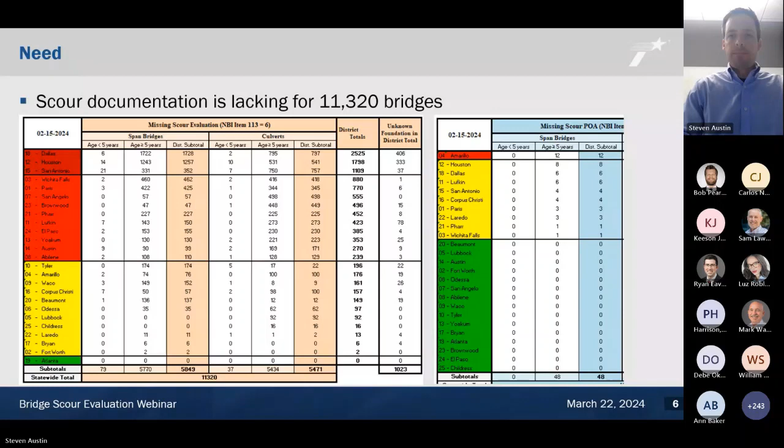Local governments don't always provide complete information to properly inventory bridges. So the outreach to ask to send this out to local governments was to help spread that awareness and increase awareness of the need to have complete information.

Some scour evaluations performed in-house and by consultants are sometimes incomplete or overly conservative. So this webinar will touch on that and make sure that we're consistent across scour evaluations. And finally, TxDOT staff aren't always clear on expectations for reviews.

Our presenters today are Ryan Eaves, our state geotechnical branch manager out of Bridge Division. Chunh Lee, our scour engineer, is really our lead technical resource with anything related to scour. He's a primary author for our scour evaluation guide and really takes the lead on updating our forms and making those changes. Yusuf Yurattas recently joined Bridge Division as a scour engineer, and he's working with Chunh on our documentation, our policy, and quality controls. Mark Wallace is our bridge inspection program manager and bridge inspection branch manager, and he'll be talking about the bridge inspection side of things. And Bob Pearson, who is a bridge inspection quality assurance engineer, working under Mark Wallace. So with that, I'll pass it over to Ryan to start talking about TxDOT scour evaluation and scour coding.

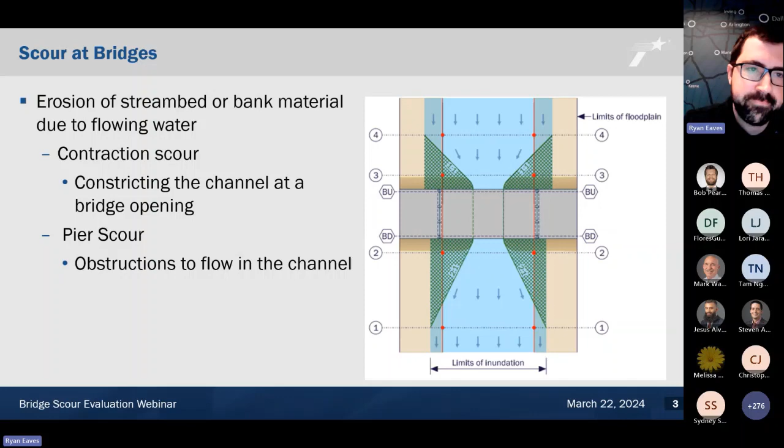One of the big concerns with scour at bridges is foundation exposure, or loss of axial and lateral capacity. We rely on our foundation elements to provide resistance to movement of the bridge. So exposure of these foundations can cause issues. There's also structural concerns due to column buckling and slenderness, and we'll talk about how all of that comes into play.

The other thing that's not quite as at the forefront in some folks' mind is erosion around abutments. We rely on our embankments to support a roadway just as much as we rely on our bridges to support the roadway. So embankment instability, which can result from scour, is also worth considering. Erosion around the toe of the slope can cause slope failures, and undermining of rigid structures can cause exposure of the embankment behind it and erosion of that approach.

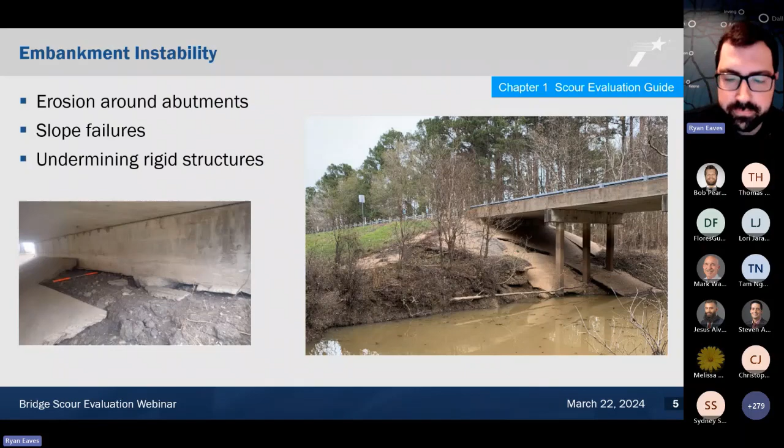Our goals with the Scour program are to predict and evaluate the effect of scour on bridges, and also to track the progression of scour over time. It's important for us to determine, with our structures, whether the scour occurring is an issue, or to predict whether there are potential issues with future scour. We'll get into all of that as we go here.

I'm going to be spending most of my time here within the Scour Evaluation Guide, with some reference to the Scour Analysis Guide as well.

I'm in Chapter 2 of the Scour Evaluation Guide here. As part of our TxDOT Scour program requirements, scour evaluations are required for all bridges over waterways. So they must be coded for scour. They must have a scour summary sheet uploaded to AssetWise that includes the information and documentation accompanying to support that coding.

This is a requirement for new structures. This is a requirement for existing structures, both on system and off system. A scour summary sheet for a span bridge by itself is not sufficient documentation. It must be accompanied by a scour evaluation. We'll go into what a scour evaluation looks like in the next few slides, but just to give you a sense, a scour summary sheet by itself for span bridges is not sufficient.

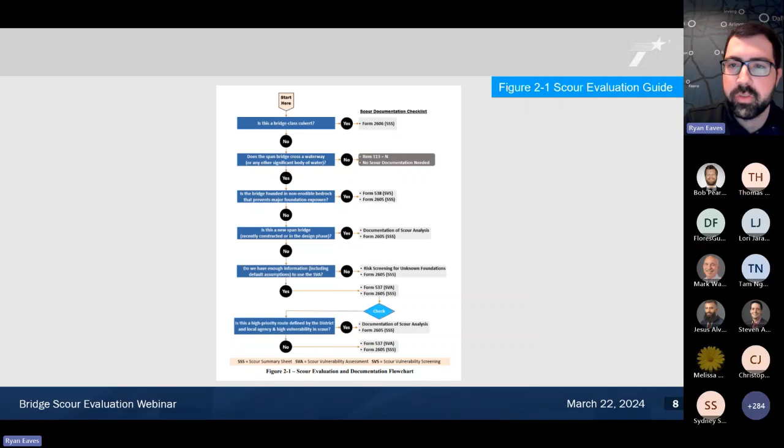This is figure 2.1 from the Scour Evaluation Guide. I am not going to go through this directly here, but I wanted to let you know that this resource is available. As we go through the information regarding evaluation approaches and what forms are needed for different structure scenarios, this chart is a great resource, and a good path to walk through to get to that point. I'm pretty much going to cover just about everything here, but not this chart directly. This would be a good reference to have open while we go through this, if you're following along.

So in its simplest form, as far as evaluation methods or approaches, there are two approaches we can take: the field observation approach for analyzing scour, and the prediction approach. The field observation approach requires that I have enough data and information to make determinations about scour on the structure, based on current and historical performance. We'll go through the documentation associated with that. If I don't have enough information, or if it's a high-risk structure, or a new bridge, then the scour analysis or prediction approach is required for those structures.

That's an evaluation based on analysis using the hydraulic data and hydraulic calculations in order to determine the scour depths.

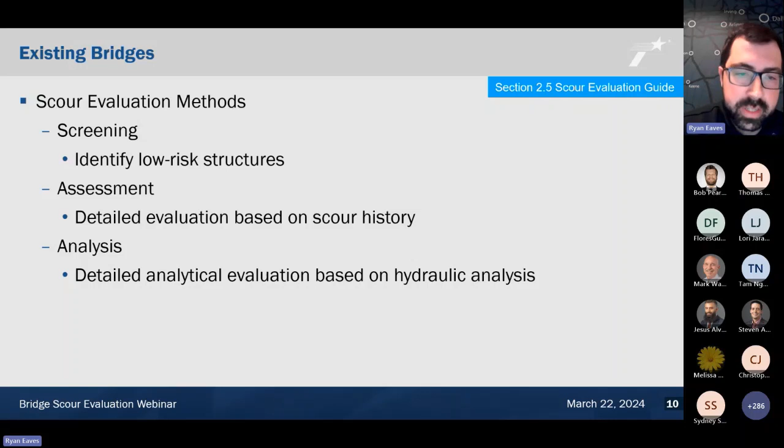So I'm going to start here with existing bridges. In our scour guide evaluation document, we have three methodologies listed: there's the screening, which is intended to identify and evaluate lower risk structures; there's the assessment, a more detailed evaluation based on an extensive review of scour history; and then there's the analysis approach, a detailed analytical evaluation based on a hydraulic analysis.

So scour evaluation based on screening. This is the scour vulnerability screening form, 538 is the reference here. Chunh will go over that a little bit more. Chapter 7 in the scour evaluation guide covers how to fill out this form, but this is most commonly used for bridges founded in non-erodible strata. The intention is to evaluate the bridge structure assuming that erodible stratum is gone, or fully scoured. Is the bridge still stable with non-erodible rock there? If yes, we can evaluate that at the maximum possible scour depth and code it accordingly. If not, we move on to a more detailed scour analysis with regards to the SVA.

So scour vulnerability assessment. Essentially what we're doing here is trying to determine the scour vulnerability class based on four criteria: channel material score, channel condition score, scour history score, and channel migration history score. I'll talk about how that comes into play as we start getting into the coding section. The scour vulnerability assessment is the entirety of Chapter 8 in the scour evaluation guide for reference.

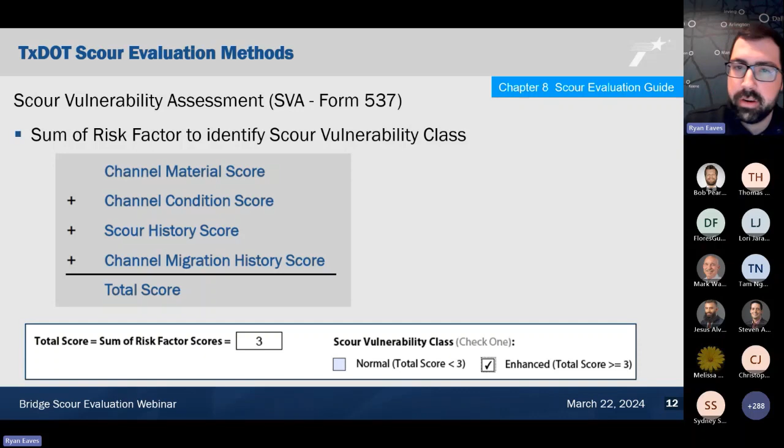And then the same thing for channel migration history - it's a sense of whether the channel is shifting. You can determine that by taking a look at past Google Earth imagery just to see if the channel is moving, and also you should be able to find that out from the channel profiles from the inspections as well.

So for existing bridges, structures identified as high risk, structures highly vulnerable to scour, and structures where I don't have enough existing information to make determinations - an analytical scour evaluation with calculated scour depths is necessary. Again, the majority of that is within the scour analysis guide from our H&H branch in the design division.

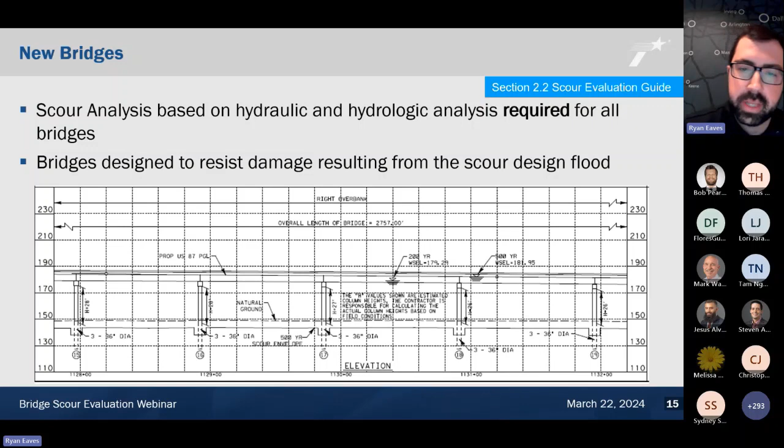The contraction and pier scour is shown on the bridge here as an example on the scour data sheet in the plans, as Chunh will talk about a little bit. But again, this is required for all new bridges, both on system and off system. Bridges are also designed to resist damage resulting from the scour design flood. So often the depth of scour is required to be considered as part of the design as well - that may affect the scour evaluations moving forward, which we'll talk about a little bit, but I wanted to point that out here first.

Scour evaluations are also required for bridge class culverts. However, that is a different form - as I mentioned before, the scour summary sheet for culverts is Form 2606. Form 2606 also serves as a scour evaluation - there is no supplementary form required for that. The scour evaluations for culverts is strictly an observational approach, and we'll talk about that a little bit once I get to that point.

Okay, moving on to the scour coding section here. As many folks probably already know, NBI item 113 is the scour coding. We have a couple of TxDOT tracking items here regarding the presence of a scour plan of action, as well as unknown foundations. I'm going to talk primarily about item 113 in this section, and I'll rely on Chunh and Yusuf to talk more about those other items as they come up in future sections.

So I have some coding definitions here for you. I have them in a bit of an odd order - it'll make some sense as I go through this, especially when I get to the SNBI section. The coding on these pages are kind of the identifier codings. For example, we have bridge not over waterway, unknown foundation over tidal waters, the presence of countermeasures, and also lacking scour evaluation and or documentation. So we have some number coding here and some letter coding associated with identifying the situations at bridges.

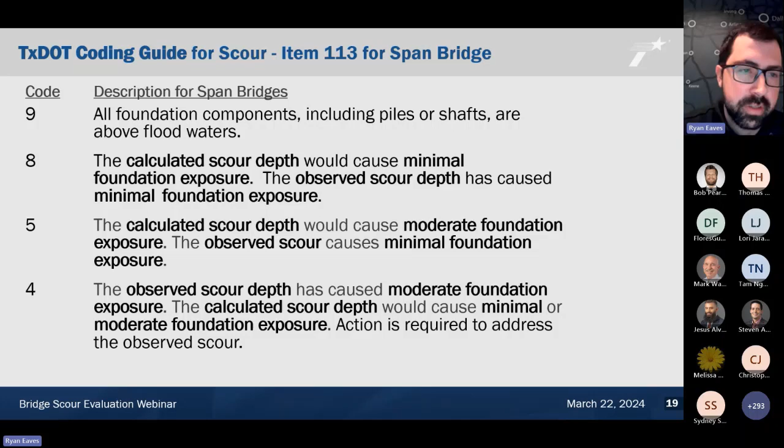Same with coding of 9 - all foundation components, including piles or shafts, are above floodwaters. Now getting to the rest, 8, 5, and 4 are a function of either calculated or both calculated and observed scour depth. 8 being there's minimal scour depth observed, or the calculated scour depth would cause minimal foundation exposure, down to a 4 where we're starting to get to the point where we're seeing some exposure. The bridge is still stable in this case, but there's enough risk there that action is required to address the observed scour.

So we make our way down towards the lower codings there. Starting at a coding of 3, that is the point that by definition we're starting to get to the point of scour critical, or we're at the point of scour critical at that point. So once we start seeing major foundation exposure and or the calculated scour depth would cause there to be instability, action is required. I'm going to go into depth on these codings a little bit more as I get to the scour critical section moving forward. But the main point of showing you this was to give you a sense that when I start referencing codings going forward and exposure categories, you have a point of reference.

Okay, so the next thing I'm going to talk about is the maximum allowable scour. So if I'm evaluating an existing, proposed, or new structure, an important factor as part of this analysis is determining what the maximum scour can be, so that I can compare my observations and my calculations with that value. So that's what I'm going to be spending most of my time on here for the next 5 minutes or so. So I have this chart shown here just to orient again the foundation exposure categories.

We use the terms minor, moderate, major, and extreme throughout the scour document. We utilize those terms intentionally so that we can pair them with other places in the document. So when I say minor, moderate, and major, those terms have implications with regards to exposure categories. I just want to make that mention. And those are typically, and we have those based on our analysis, tied to the scour coding as well.

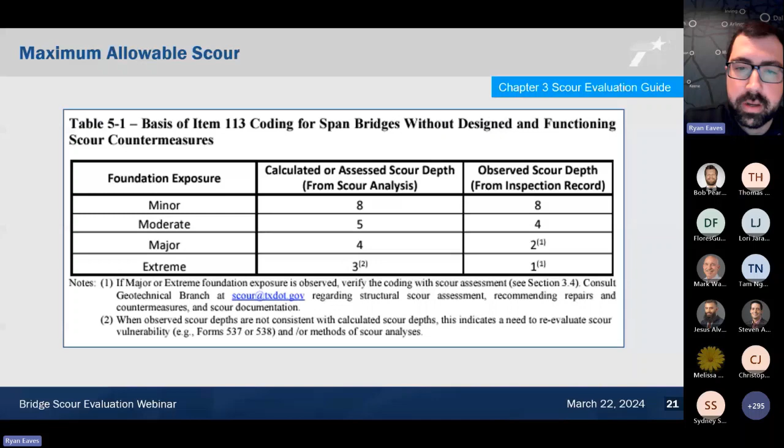For both calculated and observed. Now, there's a slight difference here, as we have seen, because from a calculated or theoretical case and an observed case, we have a different approach. So I'm going to go through some maximum allowable scour depth for some common foundation elements.

Now, for most structures that you'll come across, it'll be a drilled shaft or pile foundation. The maximum allowable scour depth for bearing or foundation capacity is approximated to be half of the foundation length from the original channel profile. There's some nuance sometimes when determining where the original channel profile was, or where the bottom of the shaft is, and we'll go into that a little bit. But the maximum allowable scour depth for bearing is half of that length.

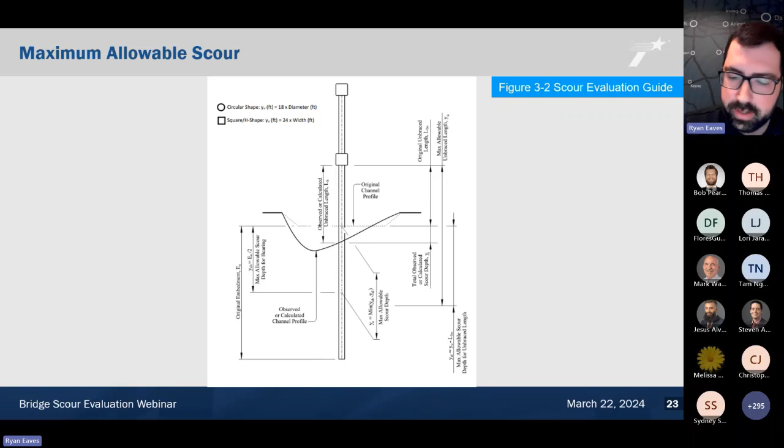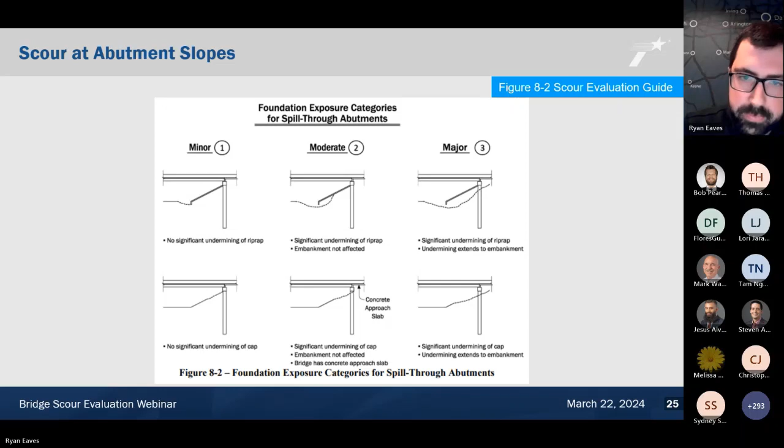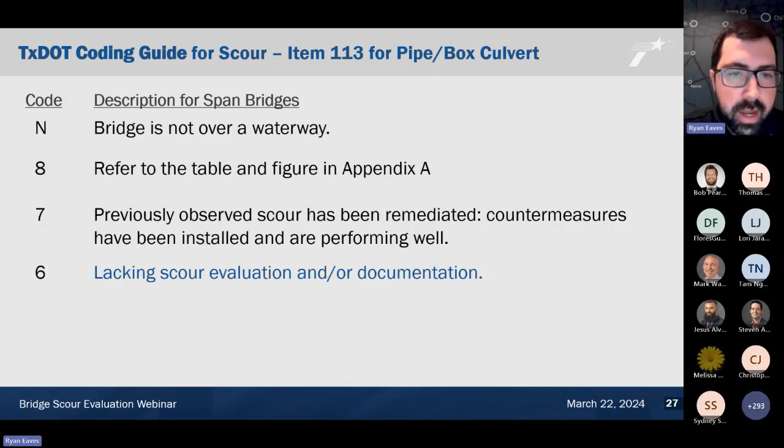I'm going to go into pipes and box culverts real quick too. You'll notice, if you look in Appendix A, that's where this is for us, that the coding is a little bit different. There are some codings that did drop off in the culvert section, and I'll talk about that in a second. But again, this is strictly observational, and most of these codes reference the figure in Appendix A.

And again, as you drop to a 2 and a 1, that reaches the scour critical threshold. Similar processes will take place at that point for bridges or span bridges as they will for culverts.

Just to give you a sense of some of these exposure categories for culverts, again this is in Appendix A, it is a function of the culvert undermining. So in the case that we have a culvert without a toe wall or an apron, it is a function of the culvert undermining, as shown in the figure here. If there is a toe wall, then it is a function of the toe wall exposure, starting from the bottom of the culvert, as shown here.

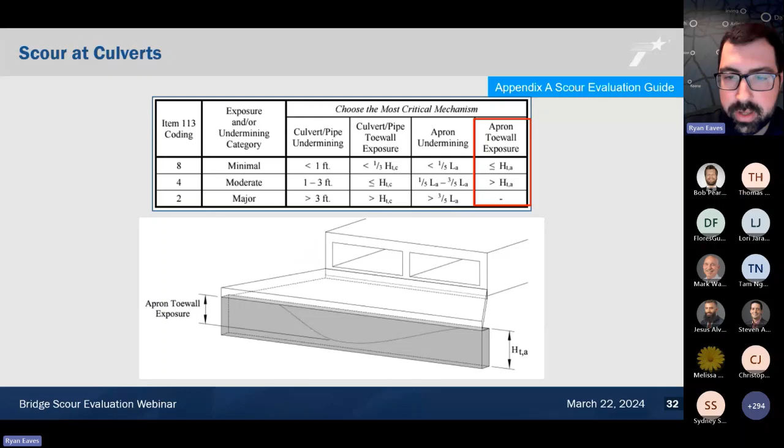If we have an apron, then it is a function of the apron undermining. And if we have an apron toe wall, which is a case where I've got scour fairly far away from my culvert, I have a different, less stringent criteria for apron toe wall exposure at that point. So just to give you a sense, these are the current exposure categories for culverts.

So to summarize, I'm comparing the maximum allowable scour and the thresholds within. The maximum allowable scour is based on the foundation capacity and the structural capacity, whichever controls, or column slenderness. I'm comparing it to the evaluated scour, which can be the observed scour as part of the SVA or SVS, or the calculated scour as part of a scour analysis, and that's how I determine the coding for the structure.

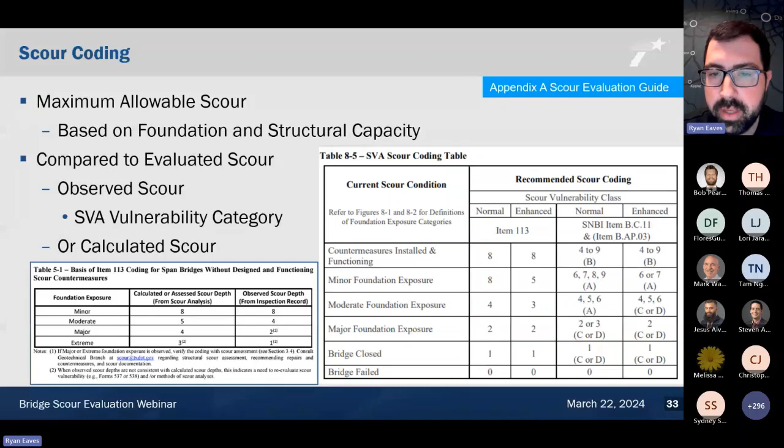So next, I'm going to go through a few examples for some things you might run into with regards to evaluation and how to consider those.

One of the biggest resources we will use is the channel profile. In this case, the channel profiles, the original in blue and the current in red, would indicate roughly 5 to 6 feet of exposure, and that's what's shown in the scour depth here. However, if I go out into the field and look at it, the inspector measured 3.

So why would something like that happen? Well, the channel profile is typically taken from a singular location, and most often that'll be referenced on the inspection report, but most often it's the downstream end of the structure, which gives me information at that end, which often matches what's happening at the center of the bridge, but not necessarily always.

The point here is that it's important to take a look at all of the information we have in order to make that determination of what's happening. So it's not just a cookie cutter, like this one piece of information is all I need. It's important that we go through the history and take a look at this a little closer to make sure we're coding it properly.

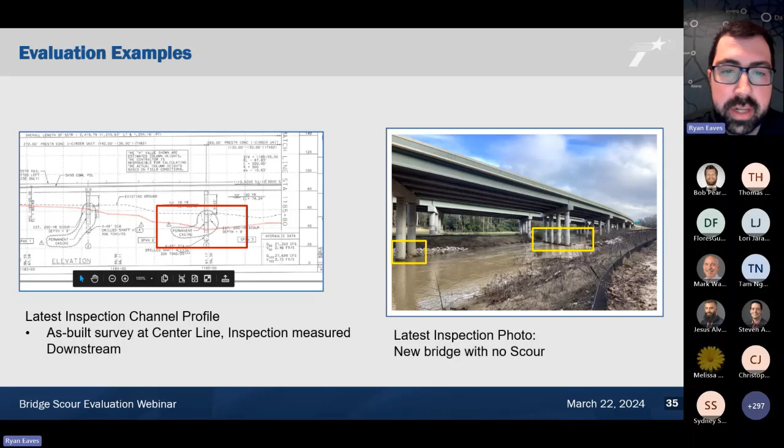Another thing I had mentioned before is often the scour depth is assumed in design. This is something that can be taken into account in a scour evaluation as long as there is sufficient information to determine that the designer did account for that depth. You need confirmation to determine that the designer accounted for that depth, but we'll talk about that in the next slide.

If there is a calculated scour depth and it is confirmed that the designer took that into account as part of the design, then the measurement for foundation capacity can be decreased at the bottom. If it can be confirmed that the designer accounted for the calculated scour depth, then the exposure categories will drop lower.

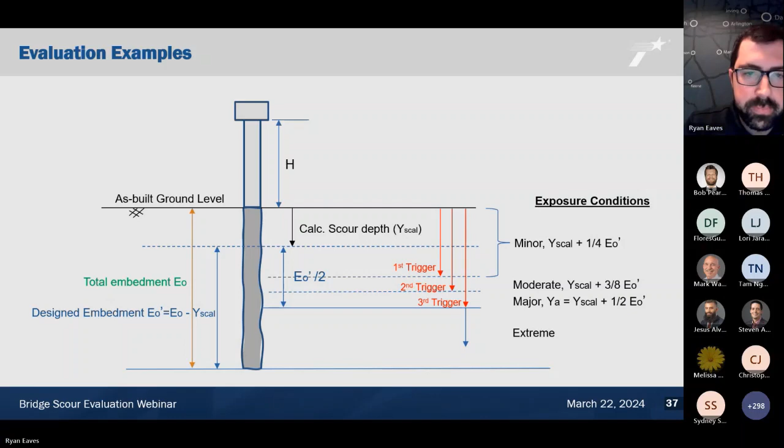Another thing is, without any context, if I'm looking at these spread footings, or if I think they are spread footings, I see this exposure and I'm concerned based on the criteria I mentioned before. But here very little scour has taken place, and there are piles underneath the footing as well. So it's important that we verify the as-builts match what's in the field, and that we understand the implication from the as-built plans.

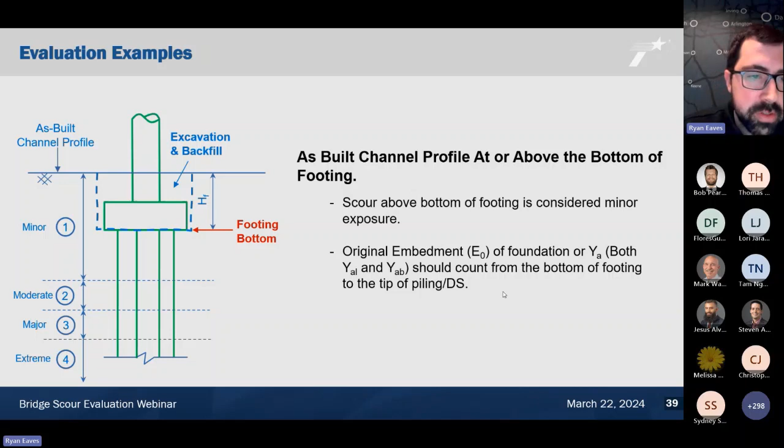So as I mentioned, the original embedment should count from the bottom of the footing, because the footing was exposed at one point or another in order to construct it.

The other thing I had mentioned before is that the half-of-length capacity I mentioned earlier, with regards to the maximum allowable scour depth, is a conservative approach.

For structures like scour critical bridges, we can take a look at the capacity and determine - in this particular case, these piles were tipped in relatively hard material with high TCP blow counts. We can also pull the pile driving records to see if a factor of safety of 2, like we mentioned before, is lower than what we actually have in the field, and make those determinations. But that's something we ask that you send to us in order to make those determinations.

So scour critical, by definition, is a classification for a bridge that is unstable or may become unstable as determined by a scour appraisal. By our coding definition, it's the observed scour depth in the major scour category, or the calculated scour depth in the extreme category, as a simplified explanation.

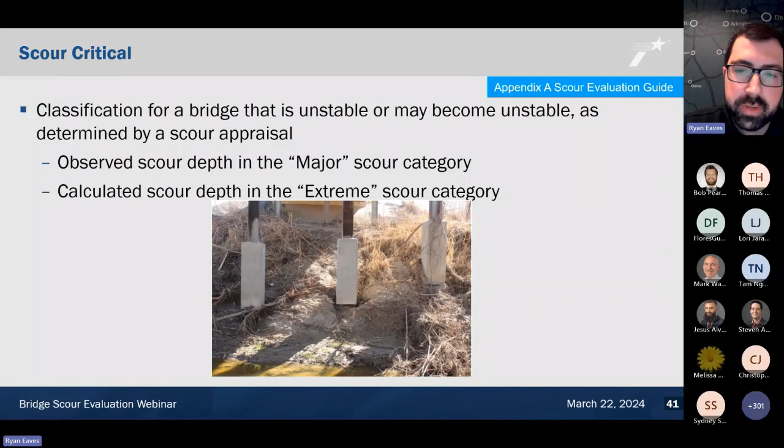The other definition is item 113 coded as a 3, a 2, or a 1. For a coding of 3, that's often used when calculated scour exceeds the maximum allowable scour depth, but not necessarily always. A POA form 2604 is required, so action is required as part of that POA form.

The coding of a 2 is major foundation exposure from observed scour depth. Immediate action is required to remediate - this is something we do not sit on. A POA form with a lot more form boxes is required. This is something we're asking now, that we should be notified in the scour.txdot.gov box so that we can evaluate it. There are a lot of things that happen when a bridge is coded a 2, so it's important that we're involved in that.

Scour coding of a 1 is extreme foundation exposure from observed scour depth that has occurred. By definition, failure is imminent and the bridge is closed to traffic. The POA form 2609 is required. This is something we want to be contacted immediately since there's bridge closure on the table. The big thing here is scour critical structures require action plans from the bridge owner - these are things that don't sit around and wait for follow up.

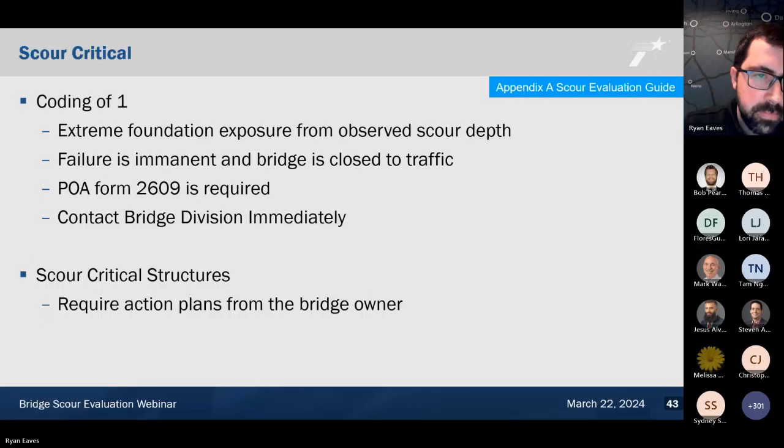Okay, next I'm going to talk about countermeasures for a few minutes. Another definition here for you: measures to improve or control stream stability and scour vulnerability. There's a number of different approaches, and I'm referencing mostly HEC 23, shown at the bottom of the screen. I'm going to talk mostly about revetment and armoring approaches.

However, if foundation capacity is an issue, then foundation underpinning may be required in order to restore any lost capacity, assuming I'm below the capacity threshold for the structure. HEC 23 also references river training structures, but these are often more difficult in practice because we don't have quite enough right-of-way outside of the bridge structures to change flow characteristics.

So I'm going to focus mainly on the revetment and armoring portion. Just to give you some examples of things we see at TxDOT: concrete armor units or articulated concrete blocks, which are semi-flexible, semi-rigid; gabions and gabion mattresses, which work a little better in cases where you're protecting slopes steeper than stone protection can handle. And then of course stone protection is our preferred approach, because it's flexible and able to self-heal, thereby requiring a little less care and maintenance.

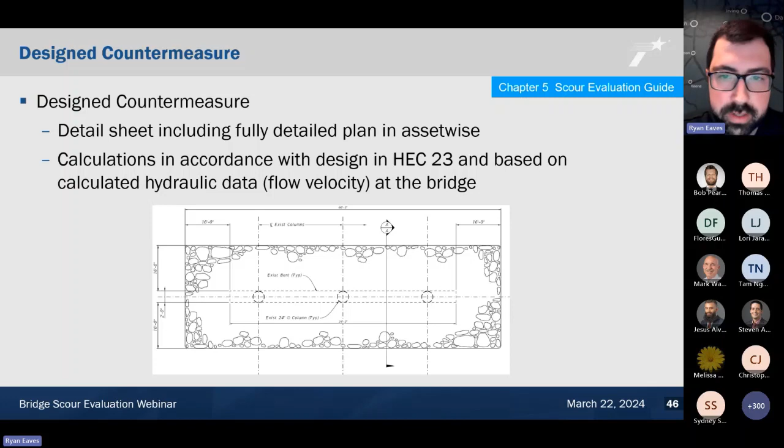So I'm going to make an emphasis here on countermeasure design. The approach for countermeasures is that they should be designed, meaning a detail sheet including a fully detailed plan, and that has both safety and coding implications, as I'll talk about on the next slide. Calculations are included also in accordance with design in HEC 23, based on calculated hydraulic data or flow velocity at the structure.

So the reason I say this is there are a few risks associated with placing a countermeasure without running through the design process. If I'm placing a material without any knowledge of what's happening with the stream or channel, the countermeasure may not be able to handle common flows. If I place a countermeasure and use that as justification to raise the coding so I don't have to monitor it as much, I haven't really done anything, because it's possible it won't be able to handle a common flow, and I wouldn't know.

On top of that, countermeasures can have a negative effect on the structure if those effects are not evaluated. Placing something rigid against piles, which is the case we saw up top, caused some issues with that structure. It can have negative effects on flow, and negative effects on the bridge structure itself if not properly evaluated. And again, it might not fully arrest the scour, so it's much harder to judge.

Now I'll talk a little about the coding approaches for countermeasures. Design countermeasures to address a calculated scour risk to get it out of the scour critical category; these can be coded to an 8 if the design documentation is included in AssetWise. For design countermeasures used to address an observed scour condition, the coding can be increased if the design documentation is included in AssetWise. So if I have some foundation exposure but I'm halting that exposure using countermeasures, then often, depending on the magnitude of the exposure, that can be coded to either an 8, or potentially, if there's a reasonable amount of exposure to the point where the bridge is still stable but there is some exposure, then a 5 might be more appropriate from a countermeasure standpoint.

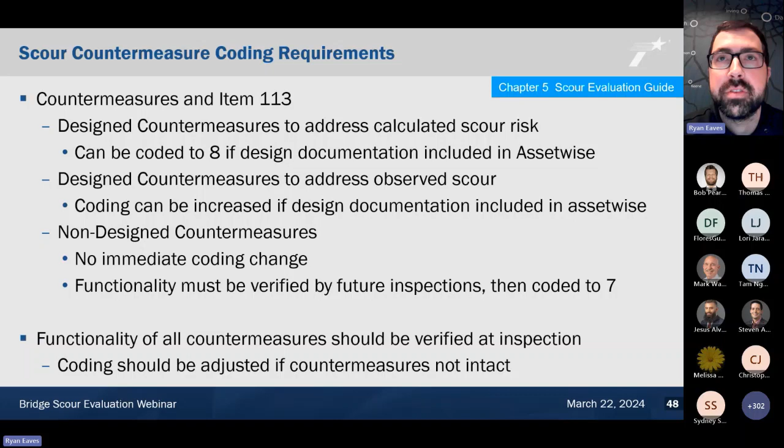Not designed countermeasures have no immediate coding change. Again, we use the term designed and functioning countermeasures as criteria for their use. So functionality must be verified by future inspections, and this would be coded to a 7 once that has been verified. However, I'll make this caveat: the functionality of all countermeasures should be verified at inspection. So if even a designed countermeasure is no longer functioning, the coding should be adjusted accordingly. It's important that we're still checking these countermeasures are functioning as intended as part of the inspection process.

Okay, I will close out the presentation here with just giving a very surface level view of the future coding changes coming for the scour items. So the big change here, you'll notice that this looks very similar, at least in principle, to the item 113 coding. The big change here is that this BC11 coding is a function of observed scour.

You'll notice that the coding of 9, 7, and 6 no longer reference those indicators. They are part of the exposure, the observed exposure here. And the other thing you'll see is that this coding isn't, as we get to the next page, as directly tied to the scour critical as it is before. So for example, a bridge with insignificant scour could be scour critical if the calculated scour exceeds that threshold. So it's a little bit different here.

So there's not necessarily a direct link, there is, but there's not a direct link from this coding to a scour critical definition. That falls under the B.AP.03 coding. I included this directly transcribed from that manual. I just included it this way because it's a little bit easier to read.

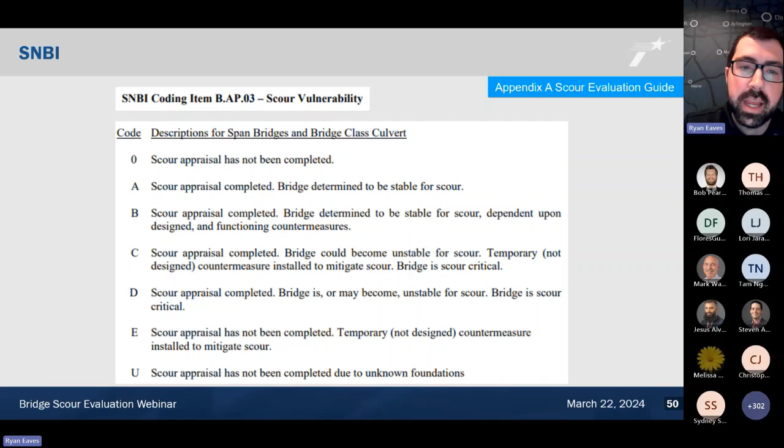So this covers all of those items so that we don't necessarily rely on these items to cover all of those things. I think that'll be much cleaner. And then we have a similar item to our 113-1 item here that essentially says, if a plan of action is required, then is there one present or not? So it forms a similar function here, but it's an official FHWA item for B.AP.04.

Okay, that is all I have for you in section 2 this morning. So I'm going to turn it over to Chunh to talk about the plan of action approaches, as well as some of our form requirements, to kind of build off of some of the things that I've talked about this morning.

All right. Do we want to take any questions before, or do you prefer? It may be easier to answer things in the chat for now, unless you have a preference, Steven. Okay, absolutely. I'm good within the chat, and if there's anything that we need to come back to and reinforce or clarify, maybe after Chunh, then that'll give us an opportunity to do that. Okay, that works for me.

All right, let me figure out my screen first. Can you all see my screen all right? Yes, yes sir, that's good. And I assume you hear me well also. All right, let's get to the fun part of it. Make sure you have enough coffee.

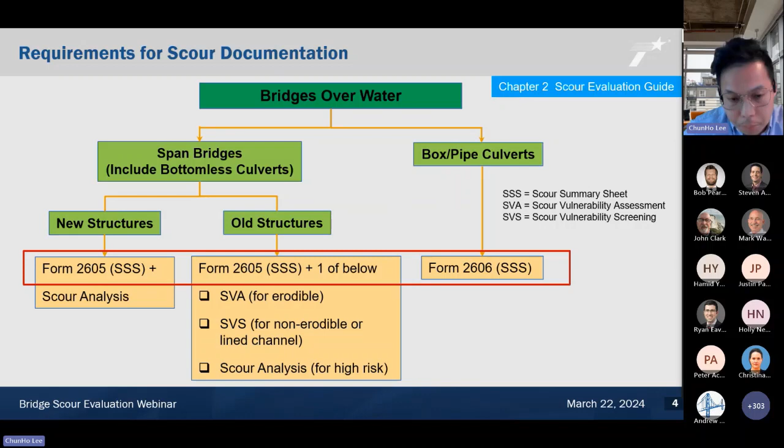Okay, bridge class culvert. Item 61, not equal to N, can mean all kinds of culvert. Again, I want to emphasize, only the box or pipe culvert with a continuous bottom supporting the structure, or impervious bottom, can use the 2606 form only, which relies on observation for Scour evaluation. Bottomless culverts, including arch culvert or three-sided culvert that do not have a continuous bottom, should be considered as a span bridge.

So let's go to the Scour documentation, useful content of the Scour documentation. Scour documentation should provide enough Scour-related information to support current Scour coding and future inspection. Not only is this content needed for tracking purposes or to check the box of fulfilling a requirement, it also provides useful info for inspection, especially in emergency situations. I think I mentioned that in the previous talk, and for a decision on re-evaluation.

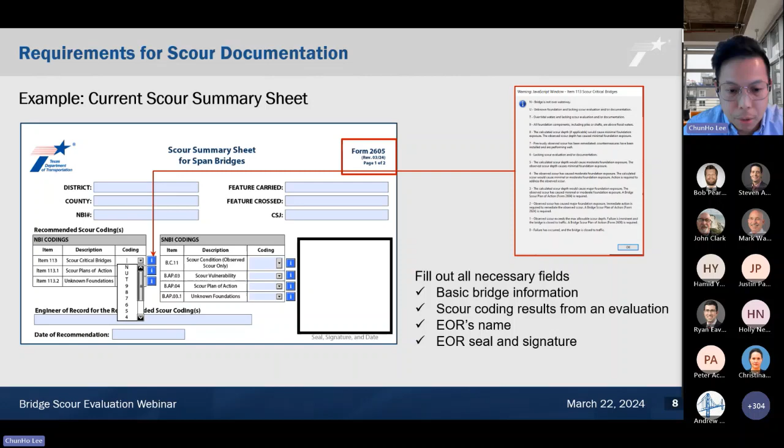Type of evaluation analysis, so someone can trace what method has been used for the coding. Later, if any Scour condition changes or may not be consistent with the current evaluation, someone can revisit the Scour analysis and use the same method or a different method to do the evaluation.

Okay, foundation detail, whether it is assumed or no detail, please go ahead and include that, if we consider this is useful info for assessing the Scour condition. This typically can be any disregarded depth in the foundation design, or Scour depth, calculated depth, or any geotechnical conservatism, because we can include that to deepen the allowable Scour depth, which will be beneficial to the Scour rating of the bridge too. We should also include any plan of action for the unknown foundation.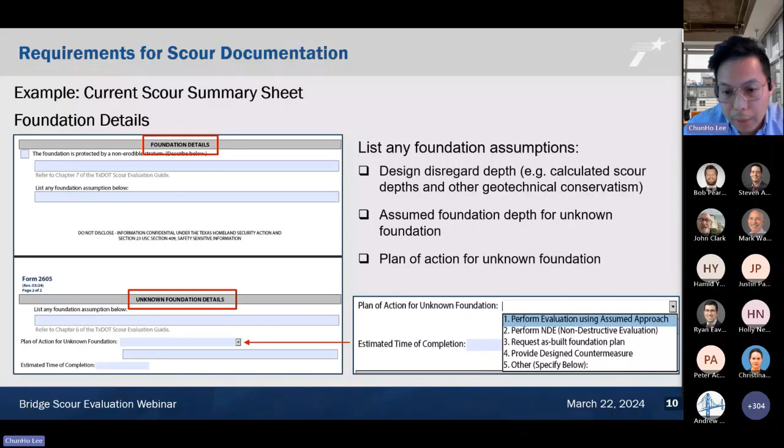So I provided a little bit of drop-down, add-on drop-down, so that this is kind of aligned with the NBI coding's recommendations. I will let Yusuf talk a little bit more about this.

So inspection detail, which inspection are we referring to for the Scour assessment, right? We don't want to refer to an inspection that had no Scour info maybe 10 or 20 years ago, or what kind of countermeasure condition is in this bridge, or what kind of channel condition. All these numbers actually contribute to the decision of the Scour condition also.

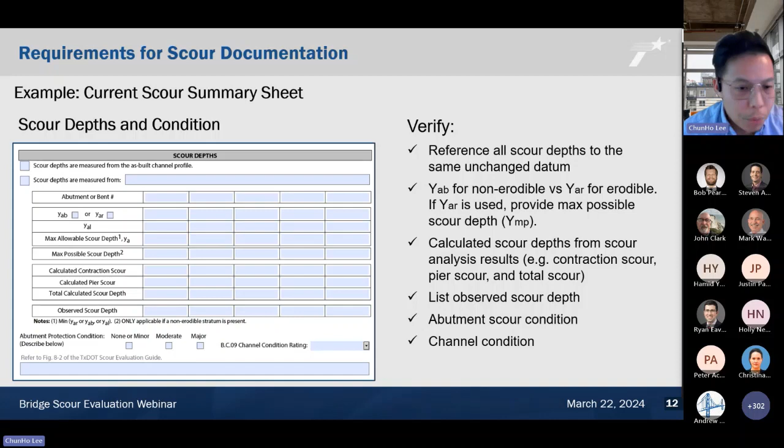Scour depth section provides a very quick and hopefully convenient summary for everyone's reference. So what is the allowable Scour depth? What is predicted? And what is the current situation, right? So we need to put it there. We rely on this depth to suggest a coding. So a good practice is to provide both elevation and depth. Again, it's a quick check, a quick reference, so anyone can revisit it and pull out the same number for a check.

So another important element is the trigger elevation or condition.

For interior bent, likely we do the trigger elevation, right? For the abutment, we typically only rely on the trigger condition, which Ryan has mentioned that maybe the bottom of the abutment cap, or any toe wall in the concrete riprap, has been scoured.

This provides inspection to know exactly when we need to re-evaluate scour condition or scour coding for a bridge. A good practice again is to provide both elevation and depth. Trigger condition, abutment should be considered too, right? When a scour depth meets or passes a trigger, that means the structure will need to be re-evaluated for scour, and a new form should also be updated.

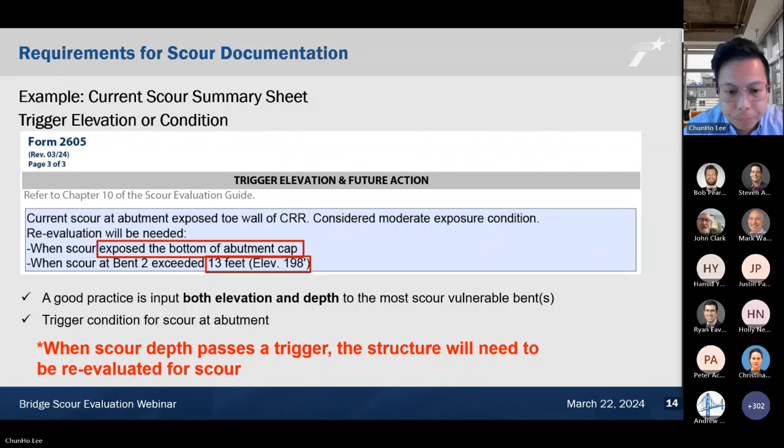Another good practice is to attach a graphical trigger in a scour summary sheet. I think it's especially convenient for scour critical bridges when a timely inspection or action is required. This provides an engineer a quick reference.

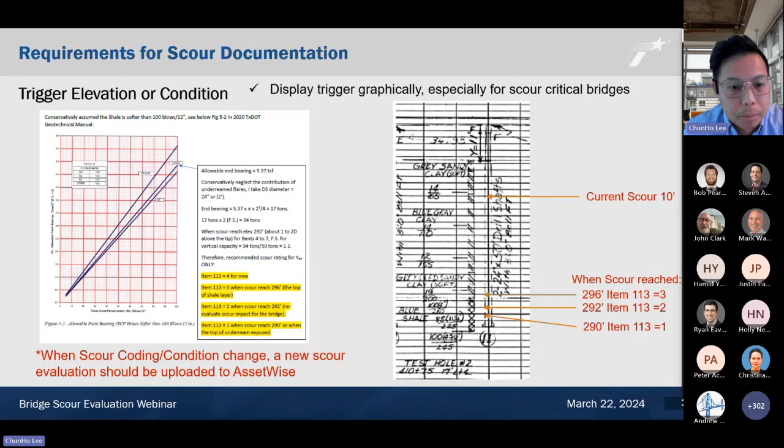So this is one example, and you can also see another example that shows what the graphical display would look like. So let's go to the supporting document.

For new span bridge, we have to do a scour analysis. Why? Because we don't have any inspection history to evaluate scour vulnerability for a channel. Also, from the preventive standpoint, the best countermeasure is actually to include the predicted scour depth in the foundation design.

I will not spend too much time on what we need in a scour analysis report, because this is a big topic that could cause another webinar to address it better. Please refer to chapter 2 of the scour analysis guide developed in the hydraulic section for detail.

I want to emphasize that when reporting, we want to make sure the report provides enough info to come up with the same result, or to be available for someone to check whether this is too aggressive or a conservative approach.

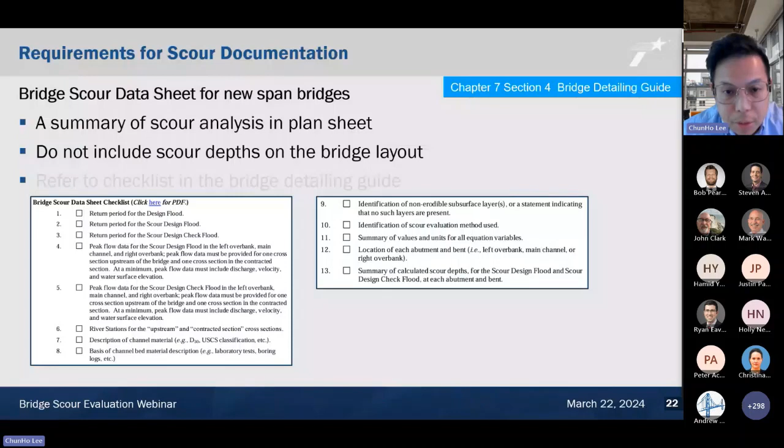So below is a checklist. I will not go through it. Please just refer to chapter 7 of the bridge detailing guide, and you can also find this example sheet in the guide too.

All right, so for old span bridge, we treat it a little bit differently. Of course, we can also have an option for scour analysis if we think it's necessary. I intentionally used 'old' instead of 'existing' bridge because it seems a good differentiator to remind us of the need for inspection history.

So I'm not planning to go through all forms here. Rather, I would want to spend some time deciding what kind of document we should look at. So for old span bridge, first we need to differentiate whether it is an erodible channel or non-erodible channel. Let's focus on the erodible channel column first.

So for erodible channel, again, we want to make sure we have enough channel history for our reference. If no, it means we want to pursue a scour analysis. Once we perform a scour vulnerability analysis using the SVA form 537, we want to determine whether the structure is critical or not. So if both scour vulnerability and roadway criticality seem very high, I think it's worth pursuing a scour analysis.

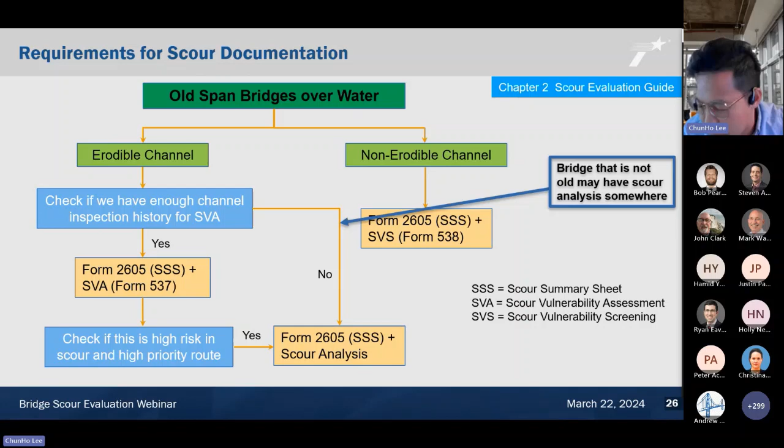I saw in the chat people asking when we need to do SVA and when we will do SVS, so I created this PowerPoint last minute.

For a non-erodible channel, the erodible strata can be very low, maybe toward the tip or pier foundation, so we don't want to call it a non-erodible channel. There's an indicator comparing the allowable depth and the scour depth to come up with a number for when we should use Form 537 for SVA.

This table is included in Form 538, the SVS form. So for the SVS form, when you go through this table, you can make a clear decision on when we should use SVA versus SVS.

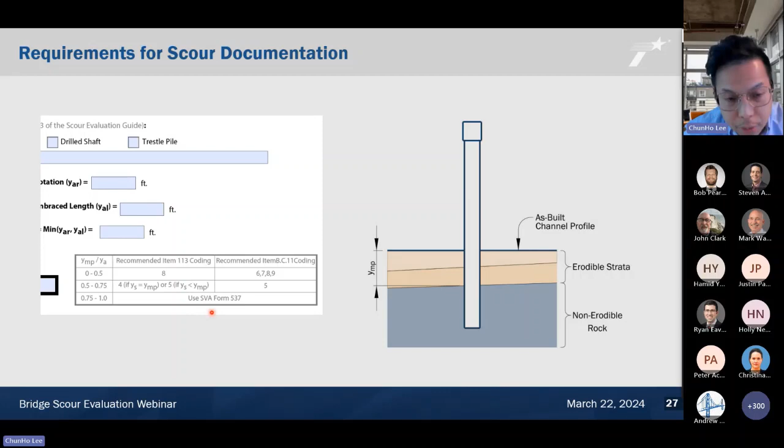Bear with me, I haven't gotten to the guide yet. I will commit myself to update the guide and upload it there also.

So, when should we update our current scour documentation? We mentioned that when a scour meets or passes its trigger, we should upload and update our scour documentation. But there are other situations we need to consider for updating as well.

Such as when the evaluation method changes, when an unknown foundation becomes known either through NDE or non-destructive methods, giving a better assumption of the foundation, or when we can find the plan later from somewhere. Then we should reconsider how we do the scour evaluation.

When a bridge is widened, it's considered a new bridge, so a new scour analysis should be needed. Keep in mind this message has to be passed to the local bridge owner or city, reminding ourselves that this is really needed when the bridge is widening.

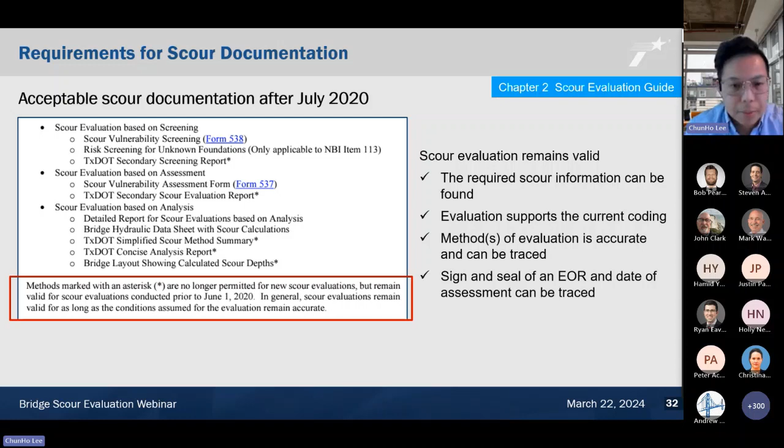So here is the need for analysis. I think this is probably one of those cases where the file may be in someone's cabinet or on the drive but hasn't been uploaded, and I'm not sure what inspection it's even referring to.

That's not good. Also, the previous scour assessment did not include the abutment condition, just the interior bent assessment.

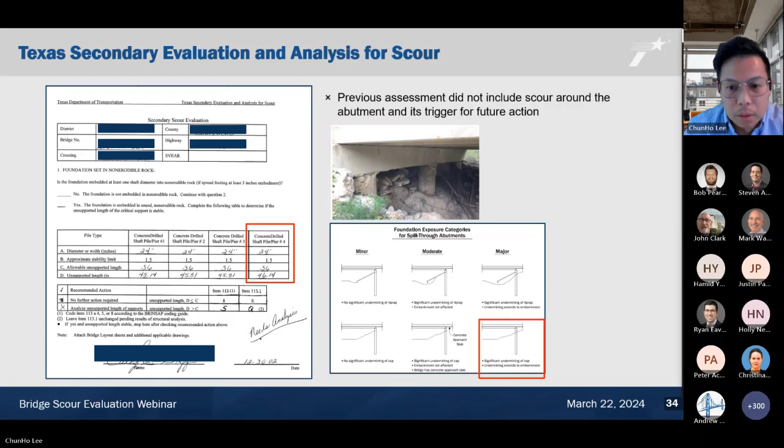So with that, we understand we need to track our scour documentation and perform updates. We have 3 systems, and I think most of you have enough experience with that.

I will briefly mention these 3 systems and talk a little bit about the nuances. We have the monthly scour report, or future dashboard-like tool, which I'll show you from Steven's email, just to keep tracking on it. There's also the List of Structures, especially the scour tab, which provides a little more information, and the QC folder in AssetWise.

At the beginning of the year, I do a bit of a favor for everyone by running a query to compare the coding, checking whether the scour file exists in AssetWise. If not, I switch the coding, and then I continue to do this every month, so later on the coding stays pretty much the same.

But again, the monthly scour report only searches the coding. It does not reflect any changes of scour documentation or any need for a new scour evaluation.

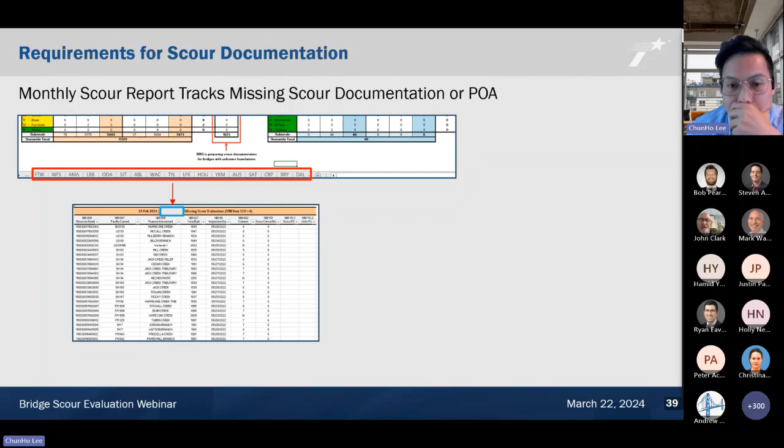I also use this time to promote this monthly scour report, which will be transferred to the dashboard later. I don't want to provide too much detail since this page may change before the actual upload. We are in the process of moving this to the dashboard, and hopefully this data will be useful for everyone to timely address issues.

Basically, the dashboard has three tabs: a summary tab for all districts with reference numbers, a detail tab where you can filter your district and the data deficiency, then pull the entire list of structures for follow-up later, and a history tab to track performance history.

The second way, which is more comprehensive, is the list of structure spreadsheet. That includes identifying scour critical bridges, missing scour documentation, change in scour condition, and suggestion of a new scour summary sheet and evaluation. So this is a very comprehensive one.

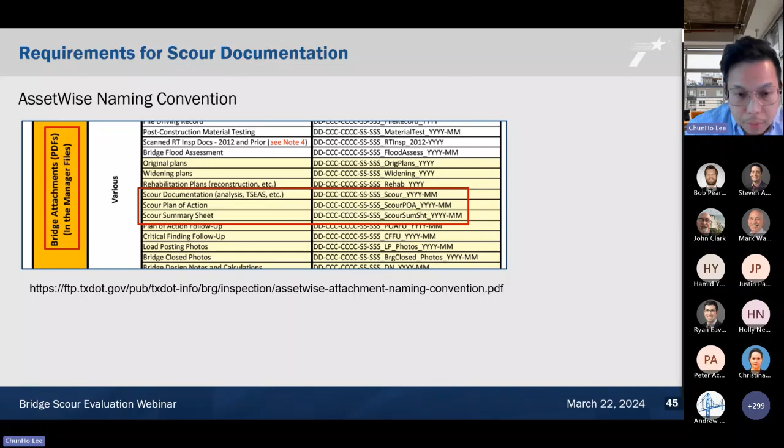Later on, I would do another query or sanity check for the scour summary sheet, so that any structure missing a scour summary sheet will pop up in the monthly scour report too. Also make sure it's stored in the bridge attachment folder, and archive all the old files to the archive bridge attachment folder - that will help us save some time.

In summary, please continue to refer to the scour documentation flowchart in chapter 2 of our Scour Evaluation Guide for proper scour documentation. I know there are sometimes nuances, whether it's a new bridge or old bridge, what kind of evaluation we need, or cases for evaluable or non-evaluable to decide what kind of document is needed. Please don't hesitate to reach out to us with questions.

The scour summary sheet will provide very convenient and useful resources to the inspection folk, but we want to make sure the info is useful. When scour coding or condition changes, we need to update our scour documentation. We have a good system, but it's maybe not perfect for tracking scour deficiency.

Please continue to follow the scour monthly report that Stephen sends out every month, the list of structures at the scour tab, and later QC scour documentation in AssetWise. So I'll conclude my section at this point.

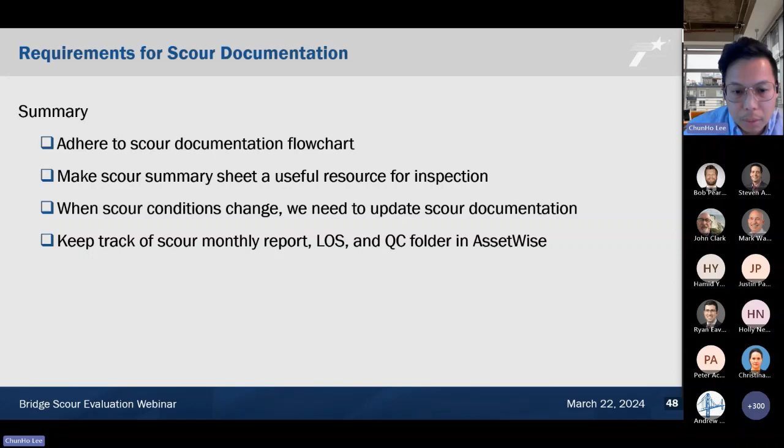All right, this section should be a little bit easier because the previous two sections have laid out most of the concept. Some content may overlap a little, especially when it comes to the tracking standpoint. I'll cut it short when we get there.

So I will talk about why and when we need a POA, and remind ourselves of the meaning behind it. Then we will get into some detail about POA. Afterward, I will walk through our current system to track and review the POA. Okay, why and when do we need a POA?

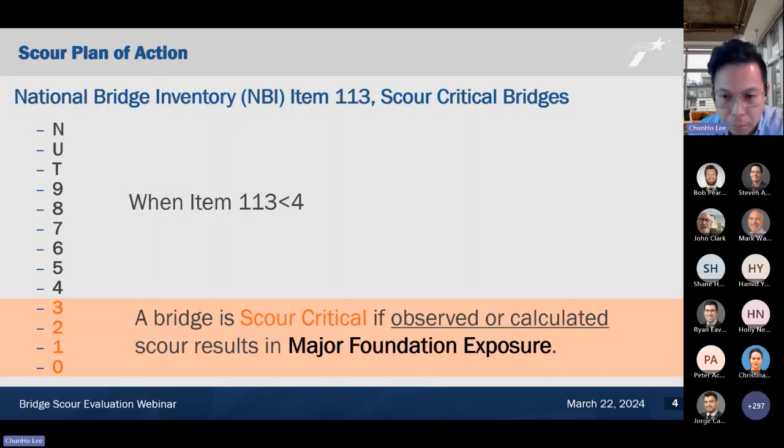A bridge is considered scour critical if observed or calculated scour results in major foundation exposure. Ryan mentioned this in the previous module - a little bit of a recap in graphic form.

So when a spread footing gets undermined or a deep foundation system has excessive exposure due to scour, to the point of levels 3 and 4 - major foundation exposure and extreme foundation exposure - or in the case of an abutment, undermining the abutment cap, or in the case of a culvert, undermining the culvert, and more.

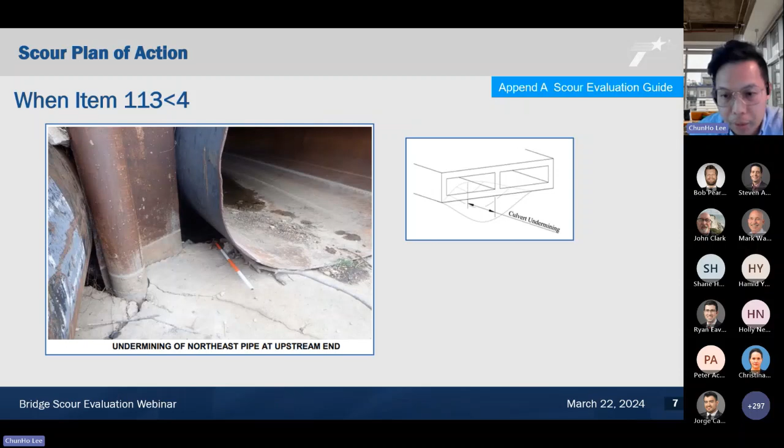There's one more thing I'd let Yusuf talk about more in his section: when an unknown foundation is found in high water, then we need to probably think about this as a scour critical situation.

So why do we need a POA? The National Bridge Inspection Standard requires developing and implementing a POA for a scour critical bridge. The purpose of a POA is to provide safety of the traveling public and minimize the potential for bridge failure by taking corrective action, and timely corrective action to address the scour issue.

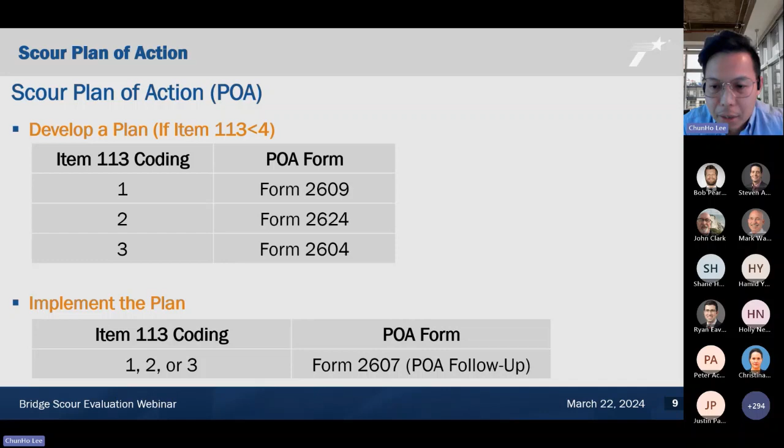In TxDOT, we need to fill out corresponding forms for scour critical bridges for item 113 equal to 1 to 3. The respective forms provide different degrees of plan of action. Each action, if physically implemented, such as flood monitoring, repair, closure, or reopening, should be tracked in a POA form, form 2607.

That's why sometimes we need to consider repair and construction. So the construction schedule in the POA, closure instructions, and each POA should be agreed upon by multiple parties to agree with the detail. That includes TxDOT or the other bridge owner.

For the monitoring program, the goal is to provide the frequency and type of measurement to facilitate early identification of a potential scour problem. And of course, providing specific instructions is very important, okay?

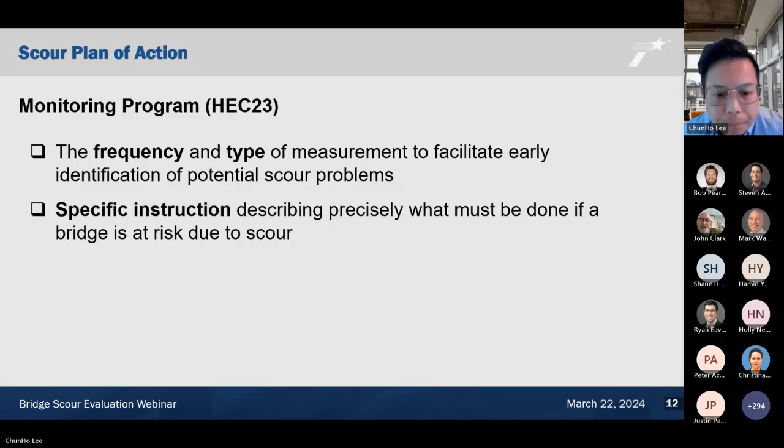So let's take a look at one of our form 2624 as an example. Under the monitoring plan, we need to provide frequency and type of measurement. And of course, for each measurement you will indicate specific instructions on what you need to do, whether excessive settlement is observed, any passive trigger, what happens if overtopping occurs, etc.

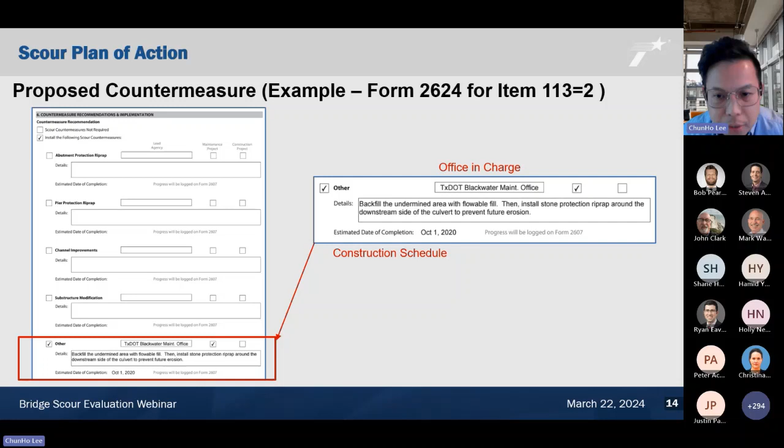If the bridge is going to be repaired, who is responsible for it, and what is the construction schedule? I need to list it out. Again, if it will become a replacement, who is in charge, and what is the construction schedule.

So when monitoring indicates the bridge needs to be closed, who is the immediate contact or contacts for closure and reopening? This is also particularly important when an emergency happens. We want to save as much time as possible to address the closure and coordination before anyone can drive on an unsafe bridge due to scour.

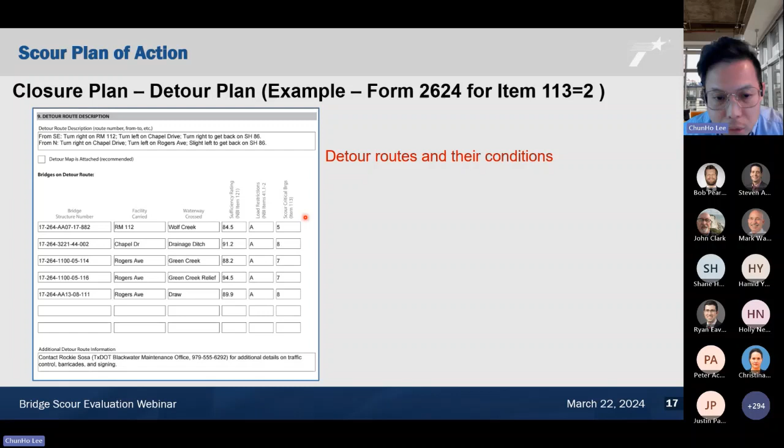And of course, after the closure, what alternative route and its condition should be thought out ahead of time. A summary outline is very helpful too for the coordinator, so anyone can know exactly what we have planned and what exactly needs to be done. That helps the coordinator reach out to the emergency team.

And lastly, this POA again needs to be agreed upon by multiple parties. More examples are available on the scour website. I'm behind on using the new scour form to update these examples. I will do that as soon as I can.

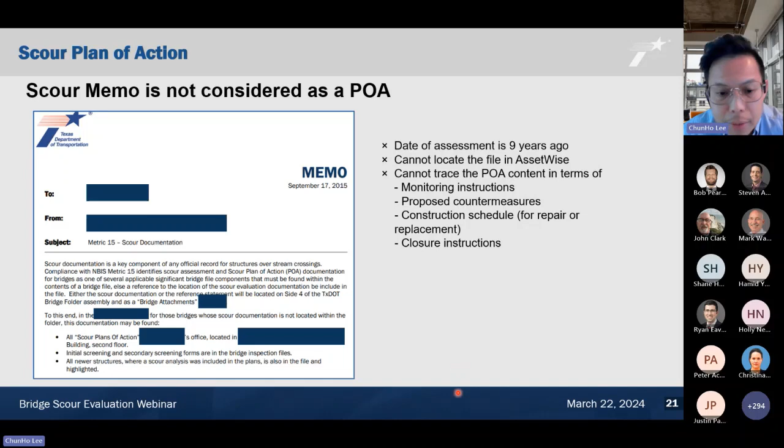A POA is very important to be accurate and available for a scour critical bridge. This is, again, for the reason of public safety. One way, we don't want a bridge that is not scour critical to be coded as scour critical. This can save emergency teams time to reach and take action on the real scour critical bridges, and it's also helpful for inspection prioritizing and staying focused on the real scour critical bridges.

On the other hand, we don't want to miss tracking a real scour critical bridge. So here are 3 basic steps we currently use to review and track the POA system. Step 1, as we mentioned earlier, we should be a little skeptical when a bridge is coded scour critical, or even though they're within the scour critical category, like 3, 2, or 1, whether they're situated in a proper number.

Step 2 is, if a bridge is really scour critical, we want to make sure a POA is uploaded to AssetWise ASAP. We want to aim for item 113.1, POA on file. Step 3, we want to make sure the existing POA reflects the current scour condition and is updated.

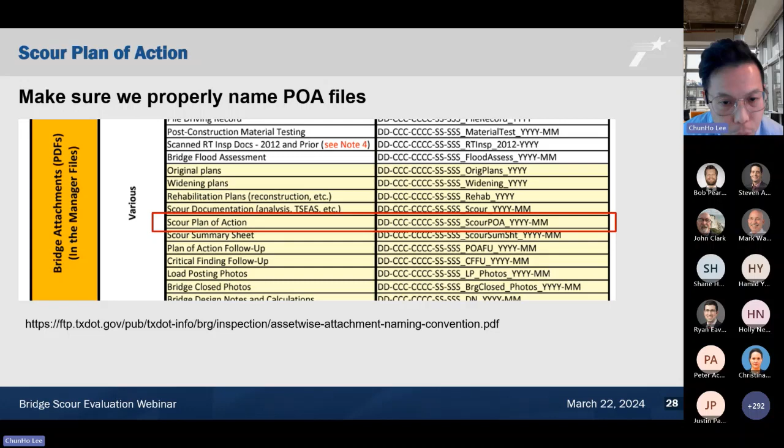Also follow the monthly scour report list of structure or QC report in AssetWise. Again, make sure the name is right, following the monthly scour report. Again, this will also appear in the dashboard later.

I will not go on top of this again. So the third thing is ensure the existing uploaded POA item 113.1 = P is current.

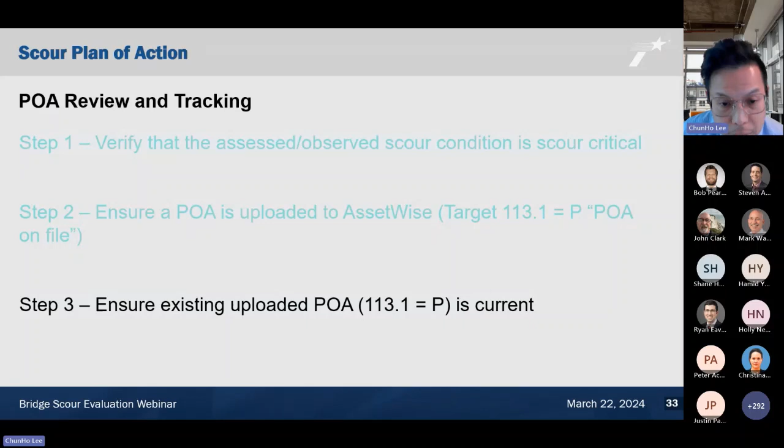Similarly, we just follow the monthly scour report list of structure and QC report in AssetWise.

I want to tell you what I'm doing also, on top of the current system. I'm reviewing POAs that were developed before 2020. Why? Because 2020 is the rough cut line for our more official scour program setup.

The idea is to gauge what needs to be updated. We found a total of 219 structures where the POA was named or uploaded before 2020. I'm reviewing about 64 structures this month.

We plan to reach out to each district to address and review the comments. Basically, if you receive my email or Steven's email later about this, you can just look at column R for N and M - that meaning the scour POA not updated, or maybe updated.

Under column S, if I advise yes, that means we need a new scour evaluation. I encourage the districts to do this exercise. I think we can remove quite a few of the scour critical bridges that were coded scour critical, probably because there wasn't enough inspection history before, but now we have inspection history.

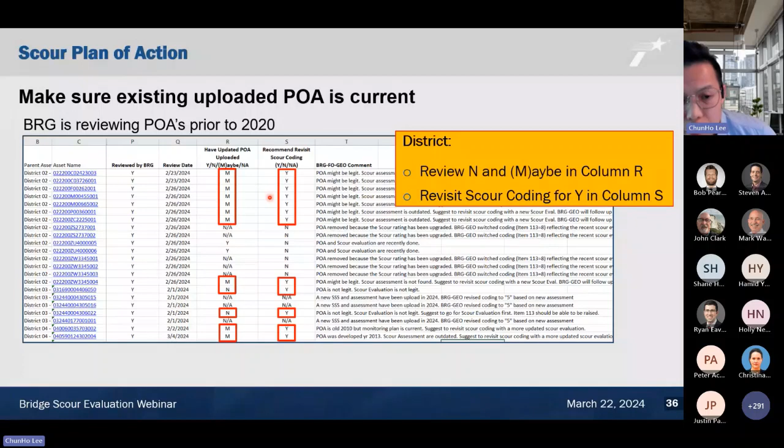So in summary, POA improves safety of the traveling public and minimizes the potential for bridge failure. POA is needed when item 113 is less than 4.

Again and again, follow the monthly scour report list of structure QC folder, and the upcoming email that I will send to you guys. With that, I conclude my presentation here.

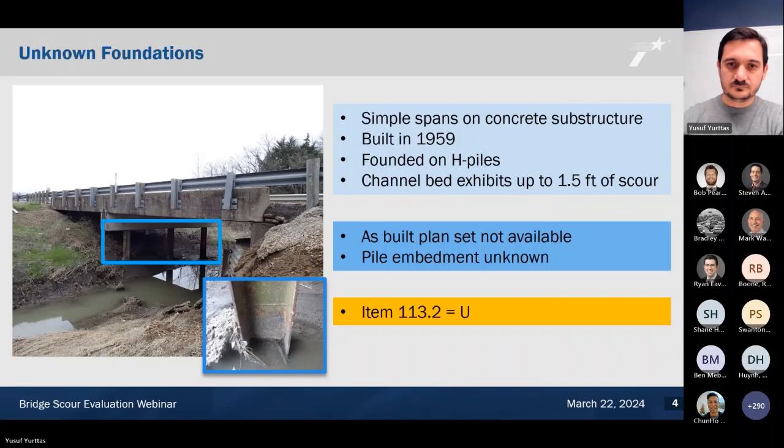So if the problem is the missing information, the solution is to find that information. The very first step to address the unknown foundation is to go through a data collection process. Can we get the as-built plans? Can we get the pile driving records or any relevant bridge information that would be helpful to complete the scour evaluation?

This means going through the archive, going through the files, and it might be tedious sometimes. I'd like to take a couple of notes here. TxDOT's microfilm records are currently being digitized and available as PDF files, widely and easily available to all TxDOT employees. All you need is to submit an IT ticket for a specific microfilm, and all the content of that film is sent to you as a PDF file. That is pretty convenient, and I suggest everyone take advantage of that.

Also, when we talk about unknown foundations, a big majority of them are actually off-system bridges. So we need to request the as-built plans from the local agencies, local government, local authorities. This way we have a better chance of receiving the as-built plans for off-system bridges.

The second method to address unknown foundations is assumption and inference. We can assume some foundation embedment. Chapter 6.3 frames the assumptions we can make by default: for verified deep foundations, 10 feet embedment; for unverified deep foundations that cannot be verified, or spread footings, we can assume 2 feet of thickness and 1 foot of embedment. On top of that, we can infer bridge foundation embedments based on similar bridges. If there's a sister bridge close by in the same vicinity, maybe built at the same time, maybe by the same contractor, a similar structure, with enough similarities we can assume the foundations are going to be similar too. But if we go that route, we need to provide justification for the assumption and documentation for that.

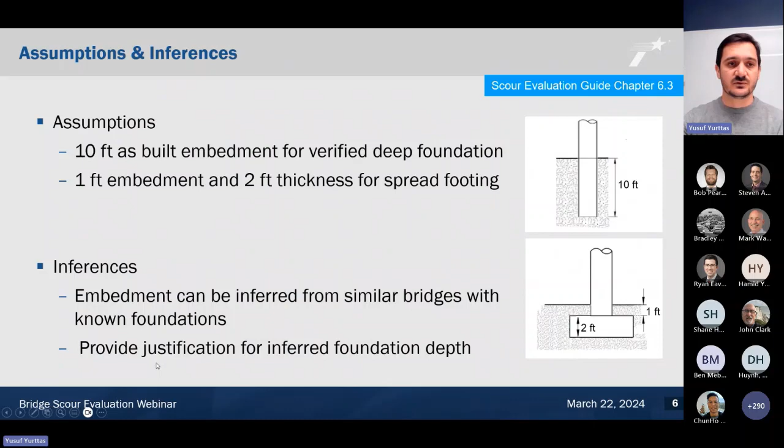Finally, the third method is non-destructive evaluation to address unknown foundations. These are test methods to determine subsurface bridge foundation characteristics, such as foundation depth, type, geometry, materials, or integrity. For scour evaluations, the foundation depth is pretty much our only interest, and that's the information we're trying to get. There are different types of tests available, and case specifically we can choose the best suited one and perform the NDE.

So far we've talked about different methods to address unknown foundations, and the question now is how do we know when to use which one? That is based on a risk-based assessment. We have a risk-based assessment tool that estimates the annual probability of failure of the bridge due to scour, as well as the minimum performance level. Comparing these two values, we define 3 categories: if the ratio of probability of failure to minimum performance level is less than 1, that's low risk; if it's greater than 2.5, that's high risk; anything in between is medium risk.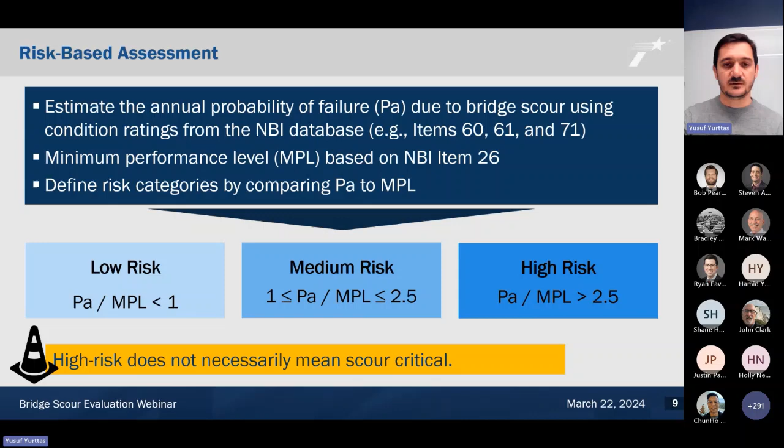Here again, the same bridge I'm referring to. The tool requires some input data. We are providing NBI condition scores for items 26, 60, 61, and 71. All we need to do is enter those numbers here, and in return the tool calculates the annual exceedance probability and minimum performance level. The ratio of these two numbers is 0.5 for this specific bridge, and if you remember, 0.5 is less than 1, so we can classify this bridge as a low-risk bridge.

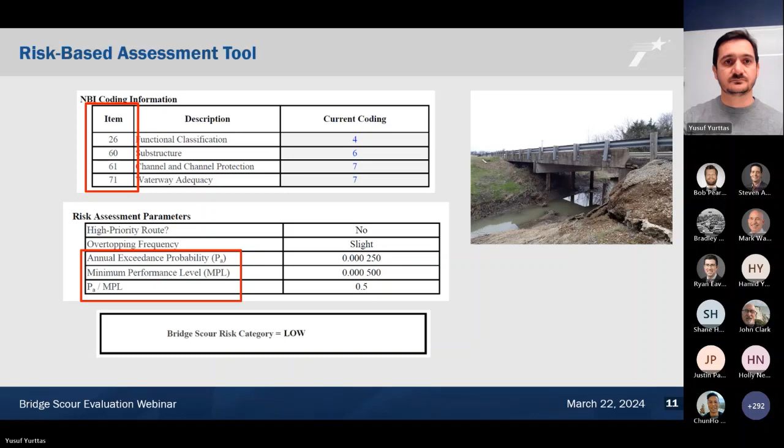Looking at the overall picture, we ran some numbers back in February to see the bridges, and for about all of our unknown foundations—currently called 'U' unknown foundations—120 of them are high-risk bridges, corresponding to about 2%. So 6% is medium risk, and 93% is low risk bridges overall in Texas.

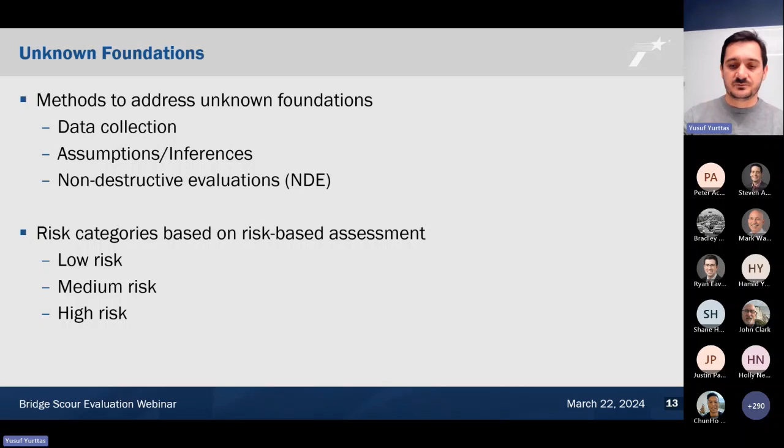Now again, we mentioned the methods to address the unknown foundations. We also talked about the risk categories to further classify the bridges. Now let's combine them together and see a map of how to address the unknown foundations.

If an unknown foundation is identified as low risk, the very first thing to do is go to the data collection process—let's find the plan set and be done with it. If that doesn't provide results back, we can assume data according to our Scour Evaluation guide, or infer data based on supporting documents from similar bridges.

For medium risk bridges, the process is pretty much the same. On top of the low risk process, for medium risk bridges NDE is now an option too. So if there is a necessity for it, we can do NDE to perform the Scour Evaluation.

However, when it comes to high risk bridges, data collection is always our first route to go—we are trying to find that plan set first. But if it doesn't return any results, NDE is now our only option to infer data. We cannot just say, okay, I want to assume 10 feet of embedment—that is not an option anymore. NDE is pretty much the only option to infer data for high-risk bridges of unknown foundations.

Meanwhile, until the NDE is performed and Scour Evaluation is done, a plan of action has to be in effect. We don't have a score for those bridges yet, so we are considering them Scour critical and providing the Scour critical plan of action until the further NDE test is done and Scour Evaluation is performed.

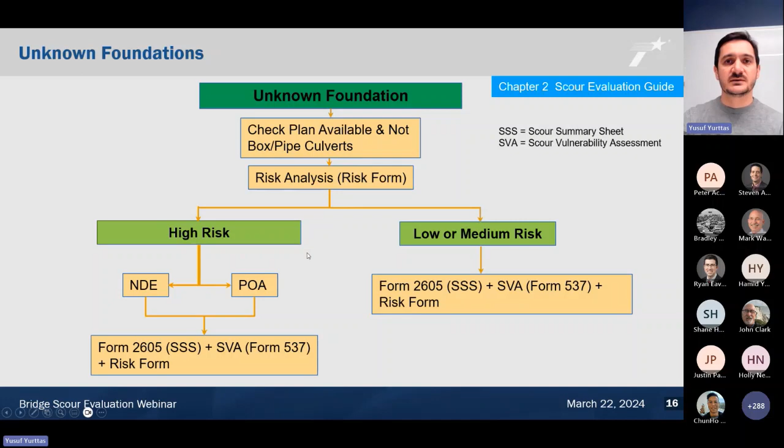So the unknown U code, we are using it in different places. I want to show them all together here and summarize what is going on.

In our Scour forms, we have item 113.2, which has two options: blank meaning known foundation and U meaning unknown foundation. But now we've updated our forms and the 113.2 definition, adding more options to that code.

Blank still means known, U means unknown foundation lacking Scour evaluation. A means it's still an unknown foundation, but the foundation depth is assumed based on our guide. NDE means unknown foundation, but the foundation is inferred from an NDE test.

To reflect that change, we are going to make a bulk change asset-wise, changing item 113.2 from U to A for all unknown foundations that currently have a Scour evaluation.

So if you are accustomed to putting U for unknown foundation previously, just know that U now has a slightly different meaning and we have more options. The drop-down menu on the new form will be helpful.

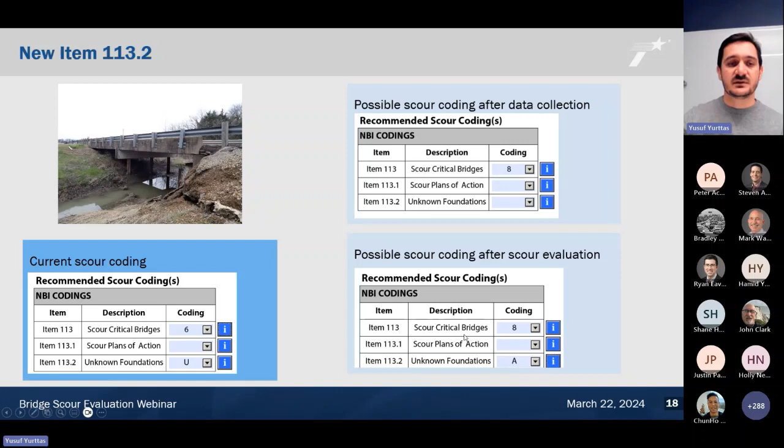Or, in the second route, if the data search doesn't give any results back, it remains unknown foundation. Since the risk assessment turns out to be low risk, they can assume the depth, and based on our Scour guide, that is 10 feet. So now A means unknown foundation, but the depth is assumed based on the guide, and the Scour rating is again possibly an 8. That is it for me. Thank you so much, everybody.

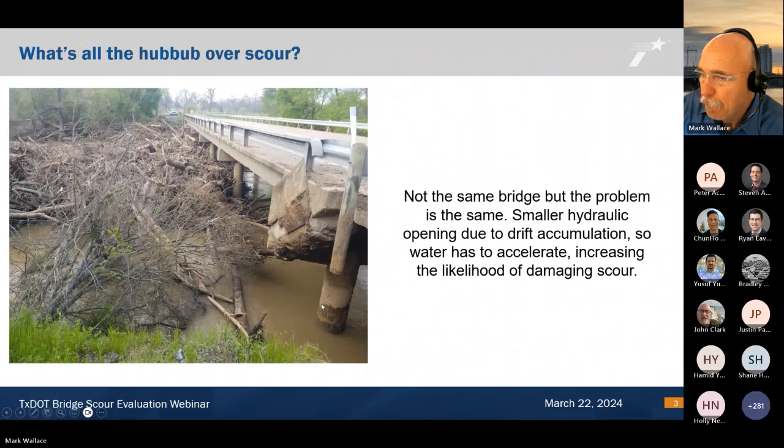We did have an unfortunate event in 2018. We lost a bridge in Kingsland, near Marble Falls, northwest of the Austin area. Luckily, that bridge got closed prior to it collapsing. There was a 40-foot rise in the water surface, so that water was screaming down the Llano River. A lot of rainfall in the Llano River basin came down the Llano River, passing under our bridge at RM 2900.

It took out all these spans. The bridge was built in '69 and had been performing perfectly.

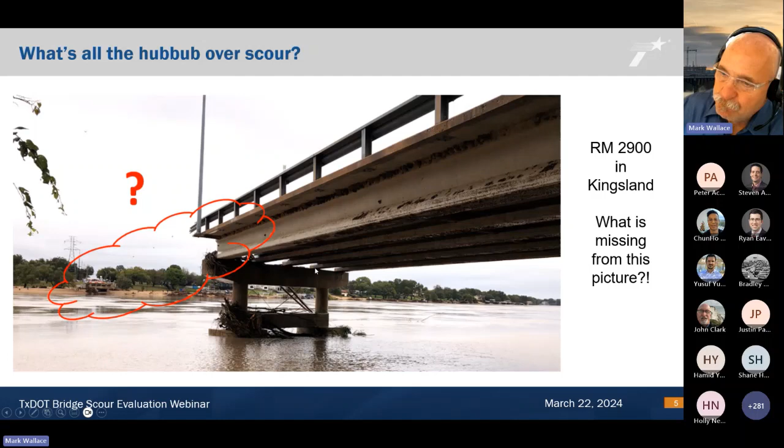In fact, the year before this collapse, the routine inspection included a plot of the channel cross section, and it pretty much was identical to the original construction, the elevation of the channel bed at that time.

What occurred was all this material was carried downstream, and eventually these piles just lost their capacity to hold the bridge up. There's tremendous lateral force on the bridge due to that very fast moving water, a little bit of drift, all that. So the piles, there was nothing left to hold them in place.

There were a couple of fortunate videos. One, there was a news crew on site at the exact time the bridge collapsed. I know videos don't always have good luck, but we're going to give this a try.

What's interesting to me, hopefully you'll be able to hear it in the audio, is you can hear on the old T1 rail that's on this bridge, you can hear that rail coming apart, snapping at the bolts, at the joints in the rail as this thing is starting to come down.

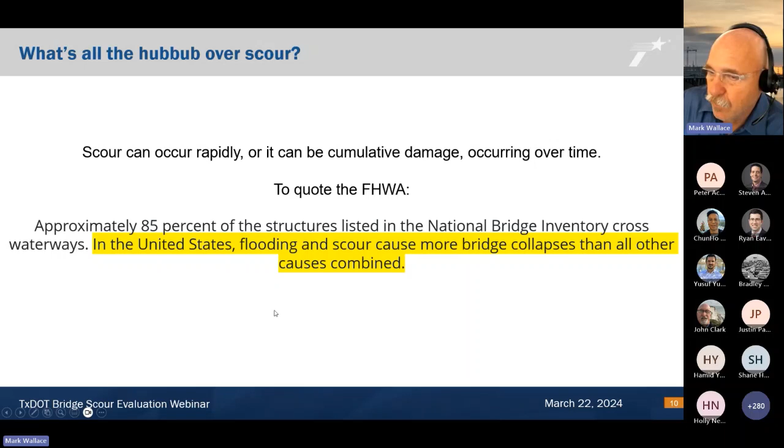Here is the heart of why scour is so important and why we spend so much effort on it. 85% of the bridges in the country in some form cross a waterway. In the US, flooding and scour essentially can be used interchangeably, and they cause more bridge collapses than every other cause combined. I think that's a very, very powerful statement.

For the routine inspectors, there's certain things related to scour that they're responsible for. One thing they are not responsible for is generating scour documentation - by that, I'm talking about analyses, evaluations, summary sheets, those kinds of things.

But in the inspection process itself, scour is certainly part of that process. They are responsible for reporting, observing, documenting whether scour is occurring at a bridge, and if it is, is it brand new scour? Did it happen since the previous inspection? Or is it changing, getting worse? Maybe some channel's moving back the other way and scour holes are filling in, or maybe there's been some repairs, or is it unchanged, maybe it's been that way for many, many cycles.

Does the current scour documentation meet the requirements for that particular bridge, that type of bridge, as laid out in the scope? Are the site conditions - the scour that's out there now, or the lack of scour - represented in the scour documentation that's in the file? What we're getting at there is we want to know if a new analysis or evaluation is required - that's kind of the kicker with that.

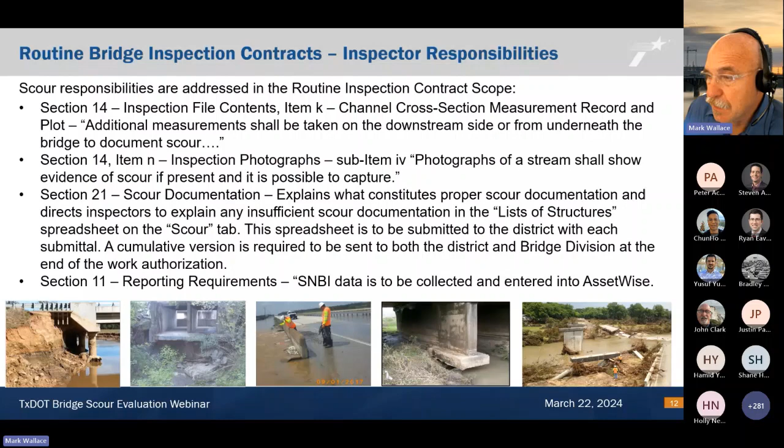And Steven, I believe — yep, that was my last one.

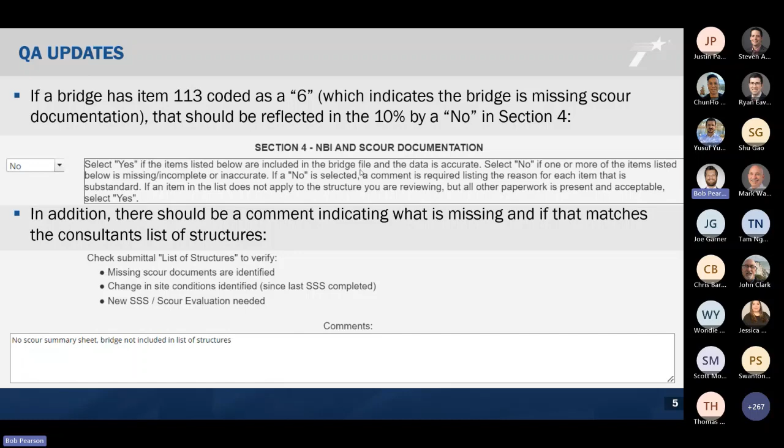So doing this check of the bridge files and the list of structures will help us kind of remind everyone about that list of structures and how it really is used, and how important it could be, or how useful it could be if it actually gets used properly to update TxDOT, the districts and bridge division with the information that we do know per bridge regarding what's missing, what needs to be updated, and what items are outstanding on our Scour documentation.

So per the scope, that final list of structures, the cumulative version, like Mark had mentioned, should be sent to the Geotech branch. And in the contract, it says the Scour engineer. I think using the Scour at TxDOT.gov link is going to be just fine for that. That's sort of like a shared inbox I use.

So like I mentioned before, this is just something now that we're starting, and it's a pretty basic cursory check just to make sure we don't rush through the 10% folder reviews too fast, and that we're paying attention to all the various sections, in this case that we're paying attention to Scour documentation, and if it exists and if it's current.